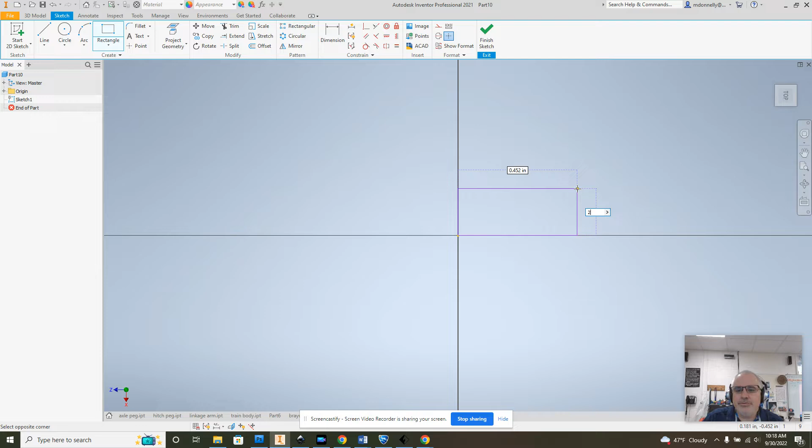Best to start on the XZ plane, that'll make it look right when you're done. I'm going to make a rectangle that is 2 by 5.5 inches long. So 2 inches, tab, 5.5, and finish sketch.

This shape we're going to extrude out 3 inches. Then we're going to grab the right plane right here, and we're going to do a new sketch on it.

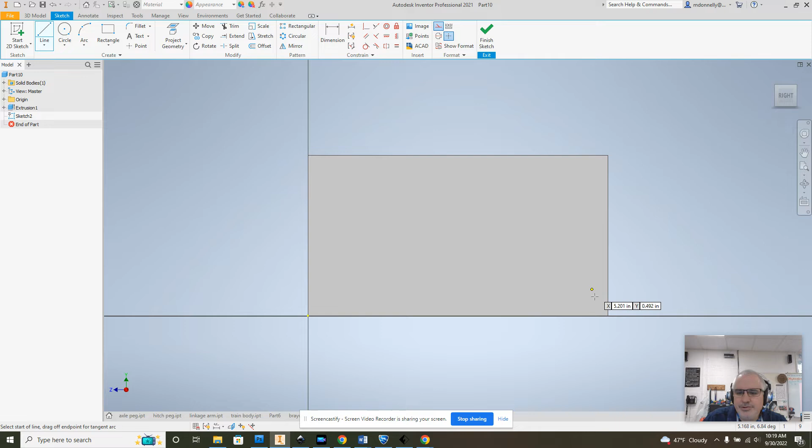We're going to use construction lines as I talked about in class on Friday. So we want to do construction lines starting here from bottom right. We're going to come over 1 inch, over toward the left 1 inch, up 1/2 inch, and then over 3.5 inches.

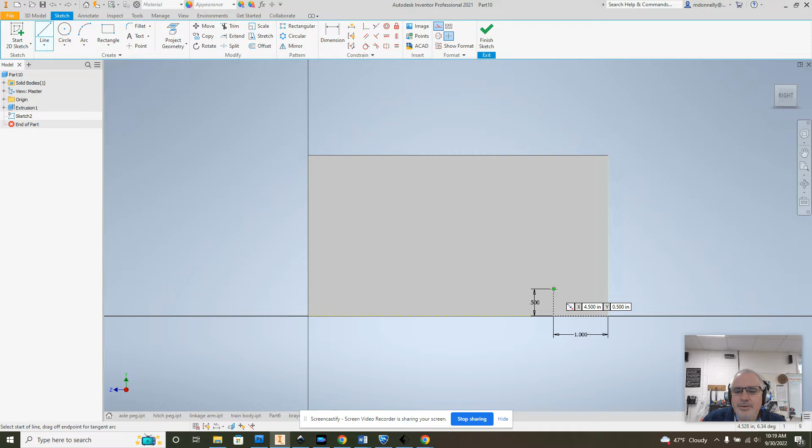Now that construction line, that can go away. Oh, that's not right, I got to fix that construction line. Somewhere right there. Over 1, up .5, and that way, 3.5. Okay, that's right. Turn off the construction line once you make those three lines.

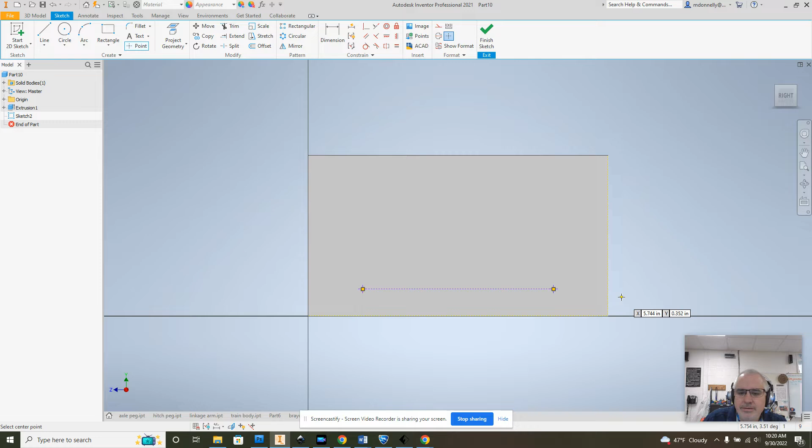These two really are useless at this point, we can just erase them. That construction line there, make sure construction line is turned off. We want to put a point at the end of each end of that line. Okay, and that sketch is finished.

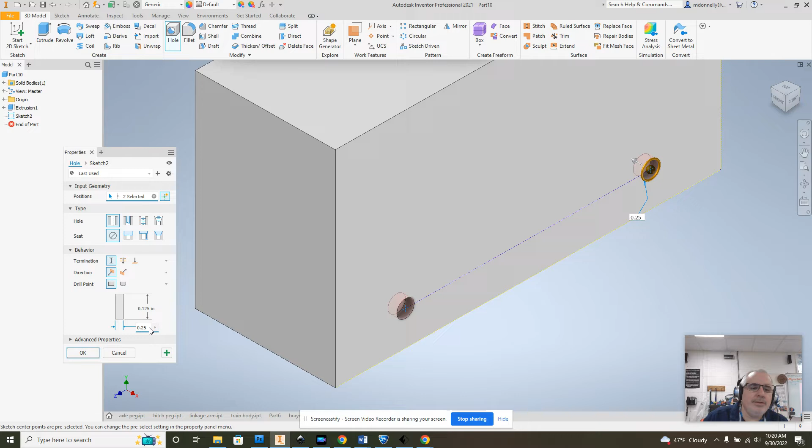Now we'll go to our hole tool. Thankfully, the hole finds exactly where we need to be by putting those points there. We're going to make a hole with a diameter of 0.25 inches. If you look at the plan, it calls for a 1/4 inch hole, through all. Okay, now we've got the holes in there.

We'll again go to the right side here, make a new sketch. Tap out because I need to work on this area here. We'll go ahead and start making the engine, the driver compartment, the engineer compartment right in front here. We'll again use construction lines to start this section.

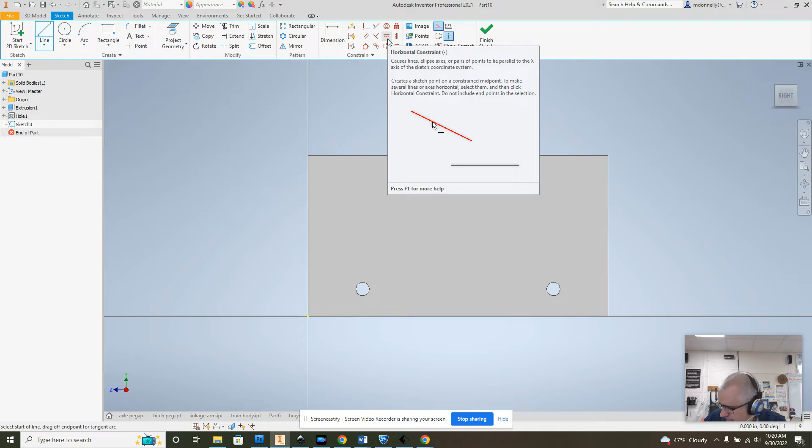We're going to go up 1/2 inch. That's where we're at, okay. Actually, we're going to go up 1.75 and to the left 1/4 inch. Up 1.75, to the left 0.25. Click OK.

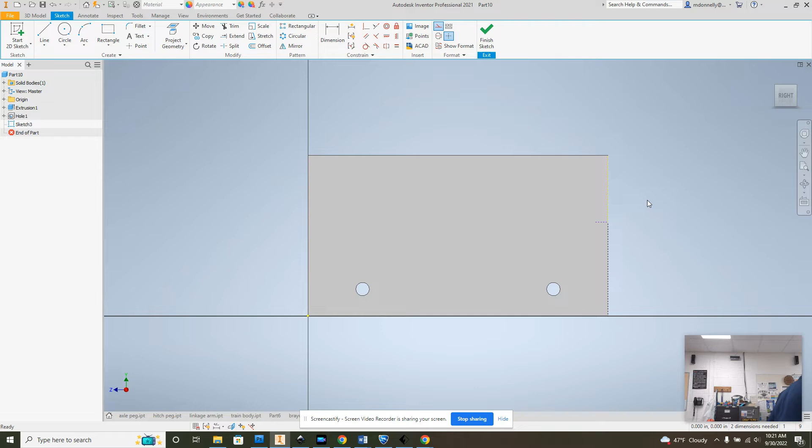Dimensions are getting in the way, make sure they're construction lines, I want to get those out of there. At the end of that construction line, hold on a moment. Sorry about that, this is kind of important. Left on the other table.

You'll see it calls for a radius of 0.5, so we're going to make a 1 inch circle at the end of that line there. And if you goof like I did and left the construction line, not a big deal. Click on the shape, turn off construction line, it's gone.

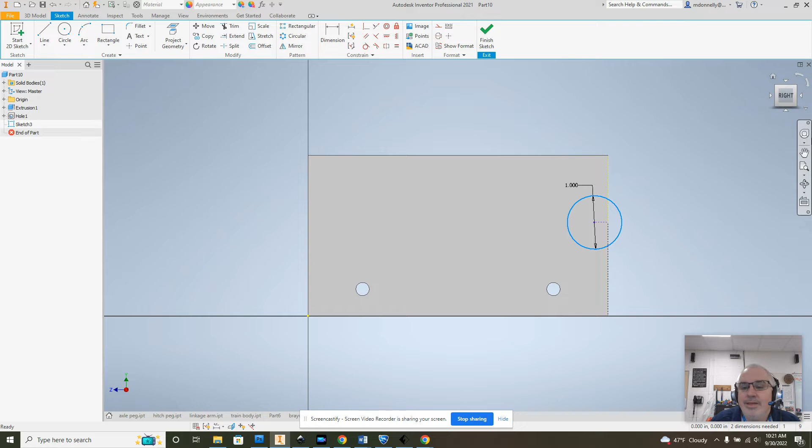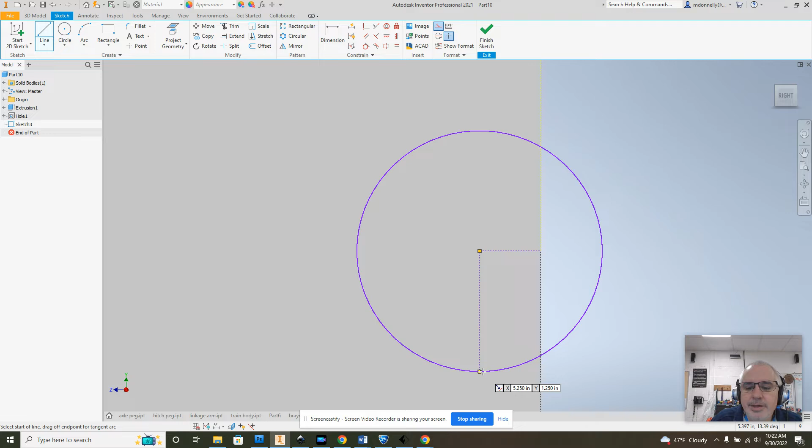Next, we want to zoom in a bit. I'm going to erase this line because I want to make another construction line to bisect it, because that'll make the next part a little easier. So we'll do a construction line, good. Straight to the bottom, 90 degrees, perfect. Straight up 90 degrees. Okay, turn off the construction line.

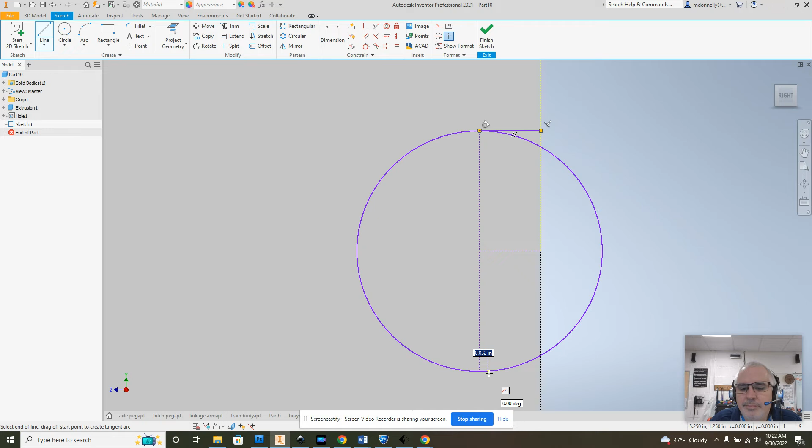We want to make lines that go from the center of the circle, as you see right there, over to the edge. Perfectly straight line like that, top and bottom. Next thing we got to do is project the geometry of the whole right side of the train.

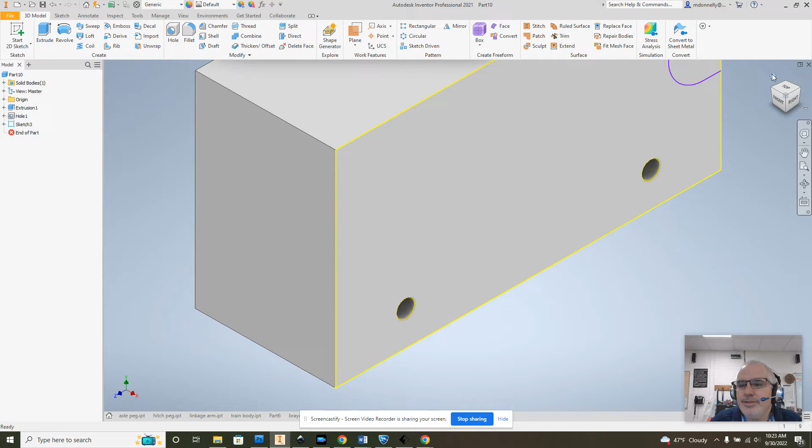Okay, now we can trim away what we don't need, namely these sections here and the construction lines, because they served their purpose. Finish sketch. And we'll go ahead and punch out that section right here, cut through all. Okay, there's that section done.

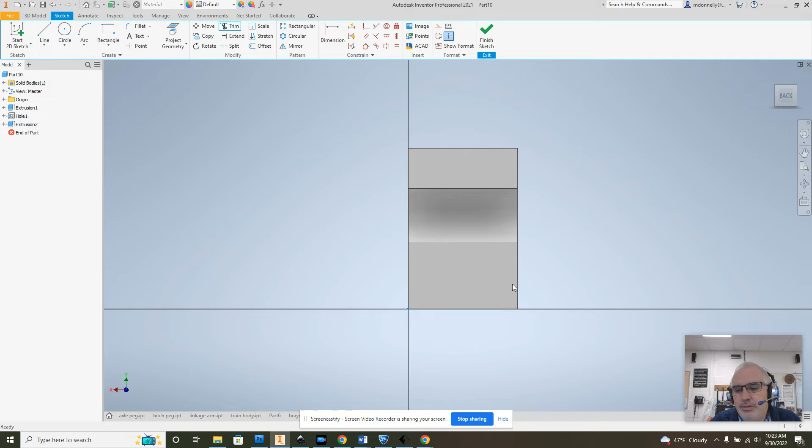Now we'll go around to the back of the train, and it's the back of the train itself as well. I'm going to go ahead and make a sketch down in this bottom section here first. The first thing we'll do, we again want construction lines. First one goes over 1 inch. Actually, don't need a construction line because it's halfway through.

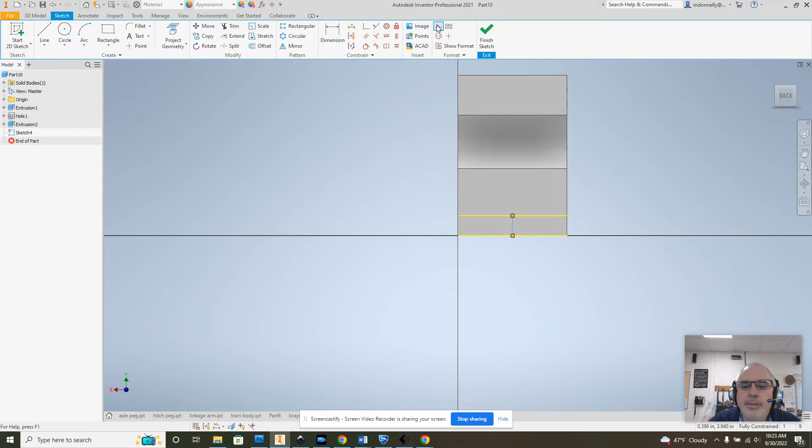At the halfway point at the bottom there, we got a little green dot that pops up, perfect. We want a construction line that goes up 0.375 inches, perfect. Where that construction line ends, we're going to put a circle with a 1/4 inch diameter. And we can go ahead and finish sketch.

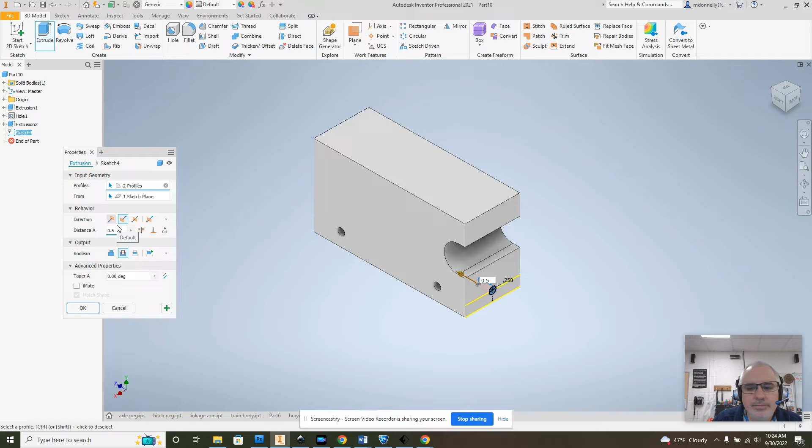That's all done. That circle we just made is going to get extruded inward, not 3 inches, but 0.5 inches. And that one's done. Now we'll make the top of the engineer compartment.

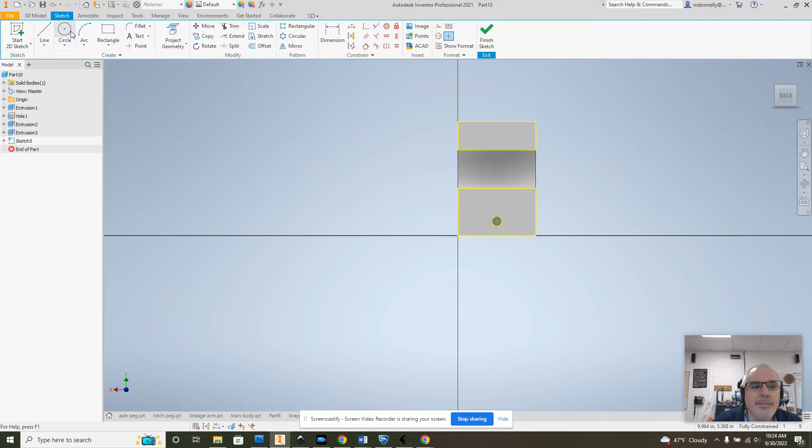We again are going to make a sketch on this plane. We want to project the geometry of both the top section here and the bottom section here, we're going to need that in a minute. Okay, we want to make a circle starting at the center of the circle of the hole we just made a moment ago. You mouse over it, it'll turn green, it'll tell you exactly where it is.

If you look on the plan, it's asking for a radius of 2.35, which for us means you can either make it do the math, 2.35 times 2, or just multiply it yourself, 4.7.

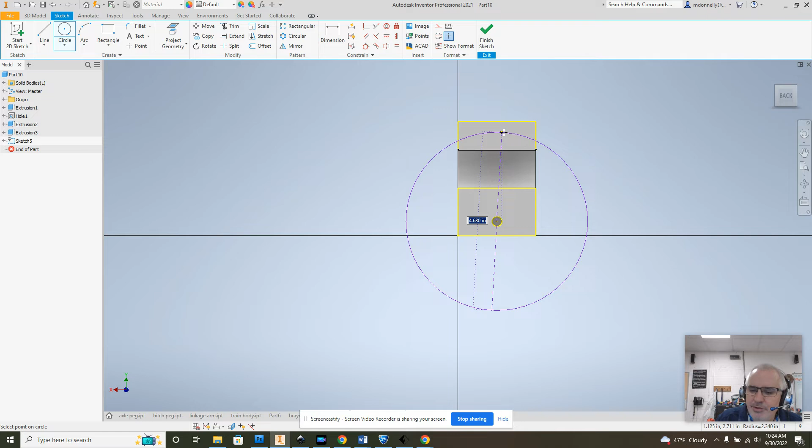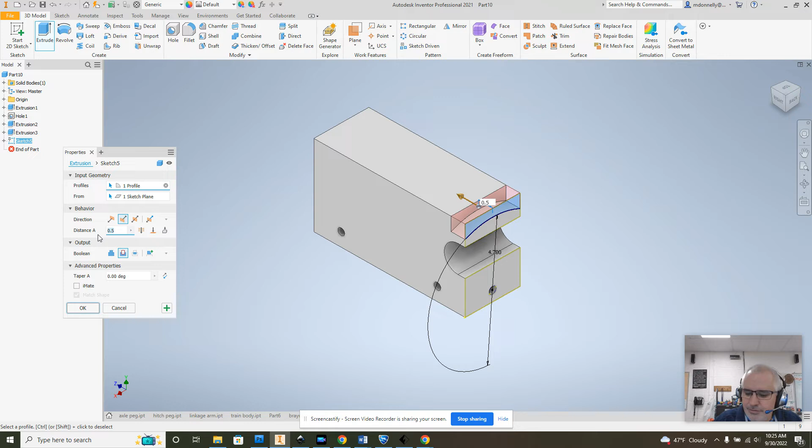Okay, with that done, we can now go ahead and trim away what we don't need, which is namely the whole outside of the circle. Finish sketch. Now we'll go ahead and extrude that top section right here. This again, we're going to cut in, and it's going to cut to a distance of 0.5 inches.

And back in the back of the train, the engineer's compartment, that's all done. Now we're going to go around to the front of the train compartment, also a front plane if you're modeling the same way I am. Right here, we're going to go ahead and make the front of the train.

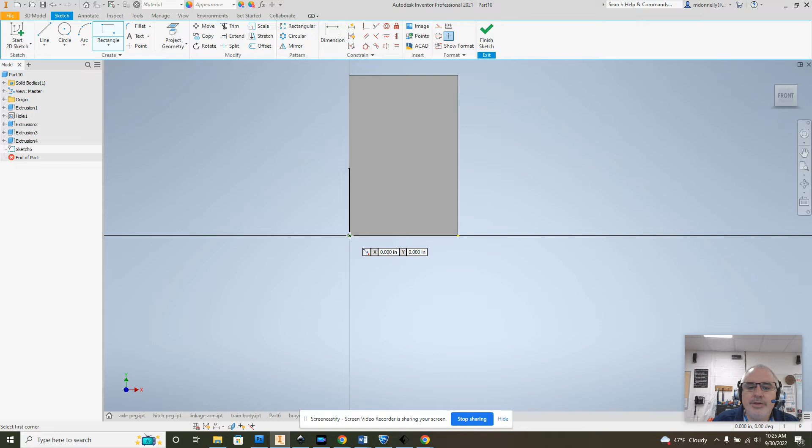So we'll go to New Sketch. First thing you want to do is put a rectangle along the bottom of this shape that is 2 by 0.88 inches. It's going to go all the way across 2 inches, with a height of 0.88.

Right click, okay. From the bottom, we're going to put in a construction line going up to the center that is 1.38 inches. I don't know why mine angled, but I got to redo it. Sorry that angled, easy fix. Straight up 1.38.

Right click, okay. We'll turn off construction line, and where that line ends, we'll make a circle with a radius of 0.75. All you gotta do is some quick math in your head, and you know that's a diameter of 1.5.

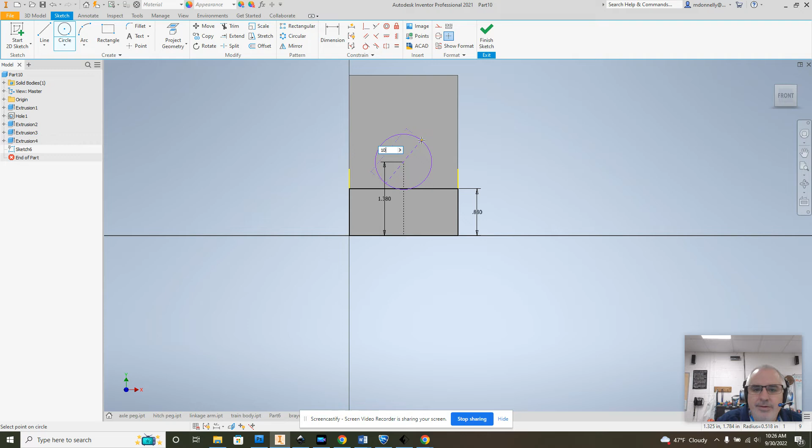Click okay. Now we can trim away what we don't need. Trim that, this, and this. Finish sketch.

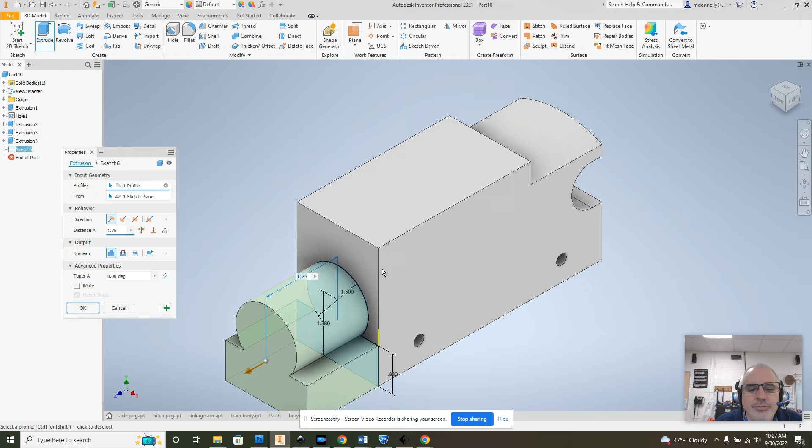We'll go ahead and choose extrude. We want to cancel, I'm not sure I projected that. If you forget to do something in the sketch, I think I didn't project the geometry here. All I can do is over on the navigator pane on the left-hand side, choose the item in question, the sketch, right-click, edit sketch, and project that geometry. Finish sketch. Now it's going to do what I want it to do because I want to choose that.

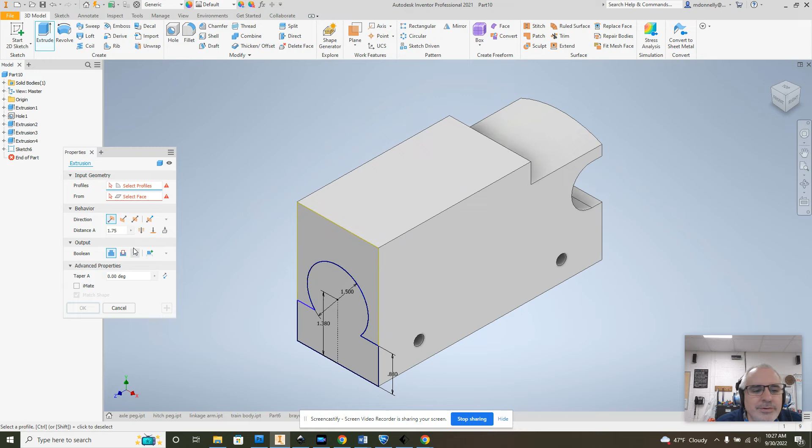We're going to cut. I'm not sure exactly how far this is, so I'm going to make it do the math of 5.5 minus 1.75, the length of the engineer compartment. Now it's starting to look like a train.

Next thing we'll do, we'll cut the holes here to mount the cowcatcher later. So we'll make a new sketch on that front plane, and again, we're going to make a bunch of construction lines.

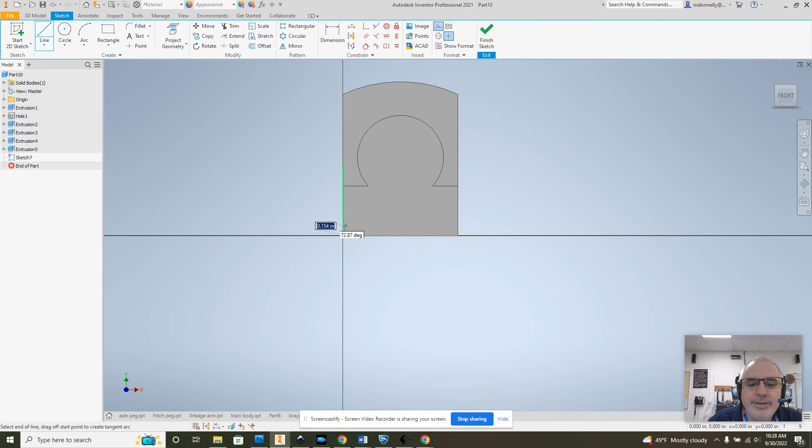We're going to make a line that goes up 1/16 of an inch, which is 0.0625. Escape, turn on construction line right here, up 0.0625. Okay, I got to modify this, I forgot a 0 in there. Actually, I got to erase it, it's goofed. Line, construction line, point 0.0625.

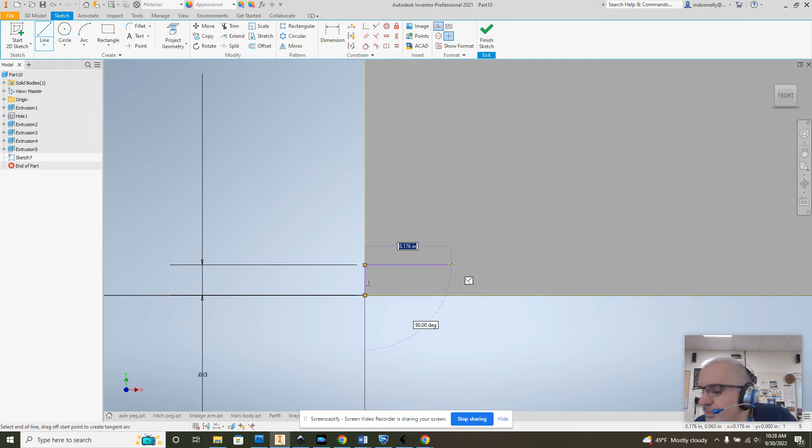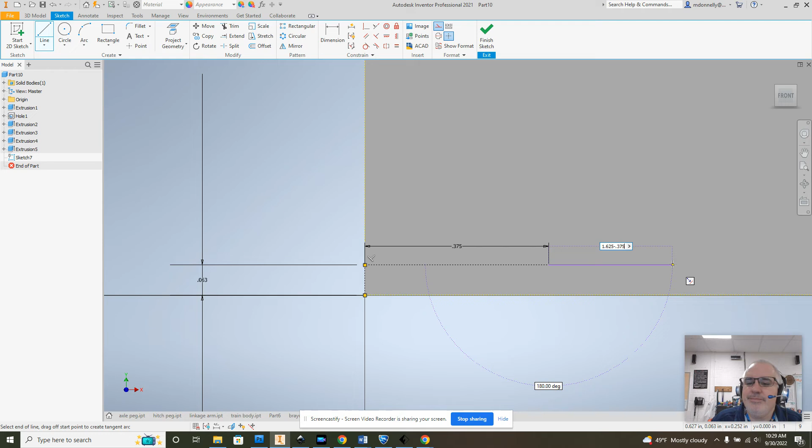We want to go over. What's that first measurement? That first measurement is going to be 0.375. And then we're going to make a second line going over. This one only gives you 2 lines, essentially both from this point here, to 0.375 and then 1.625. So here you can write 1.625 minus 0.375, and that'll give you the proper length. Okay.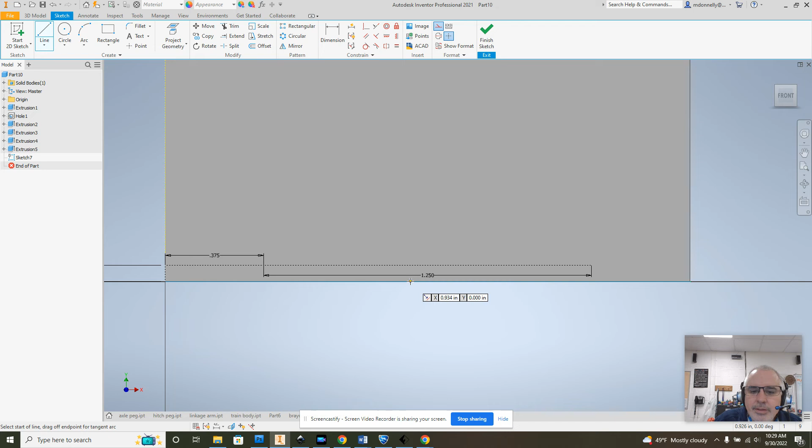One last line to make as we get this set up. We're going to make a line going up from the center that is 0.625, again a construction line. Let's find the center. Where's the center? There it is. Use the ability to find the center instead of trying to make guidelines every time, because if you don't have to, don't.

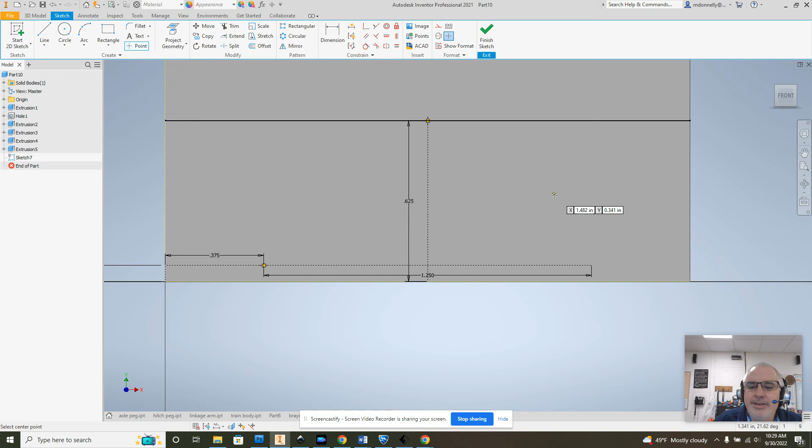Click OK, turn off construction lines. We are again going to use the point tool where all these lines end and add points in there. With those points made, we'll go ahead and finish sketch.

And then we're going to go back to our hole tool. We're going to make 3 small holes with a diameter of 1/8 of an inch, 0.125, and a depth of 0.125. Okay.

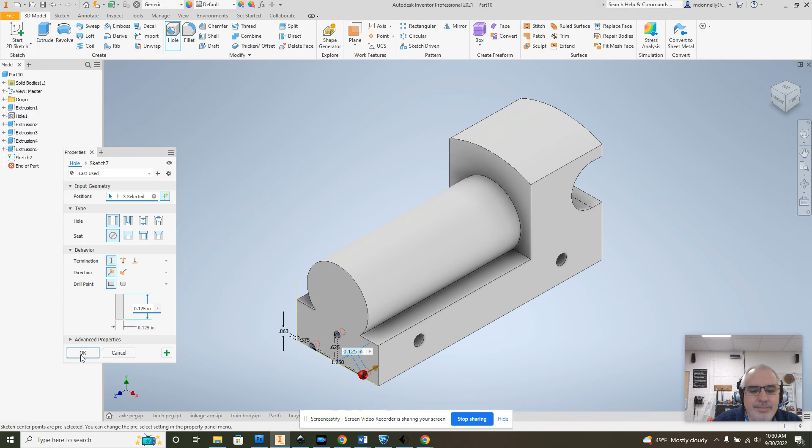Okay, last thing to do is we need to make a hole up here for the smokestack. To do that, we're going to need to make a whole new plane. So how do we do that? We'll select that surface, that curved surface right there.

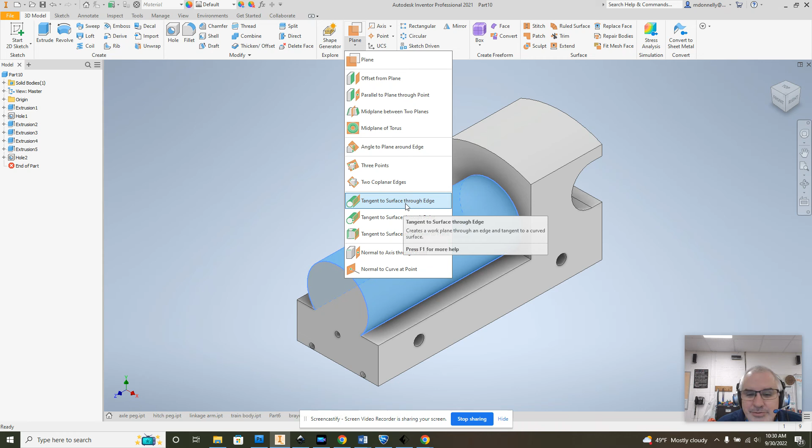If you click the drop down on the plane, you'll see a couple options: tangent to surface through edge, tangent to surface through point. Both of those are going to work. I'm going to choose tangent through edge. Actually, let me try tangent through point, that was more successful on my test run. That point right there at the top. Got it. Where'd that plane go?

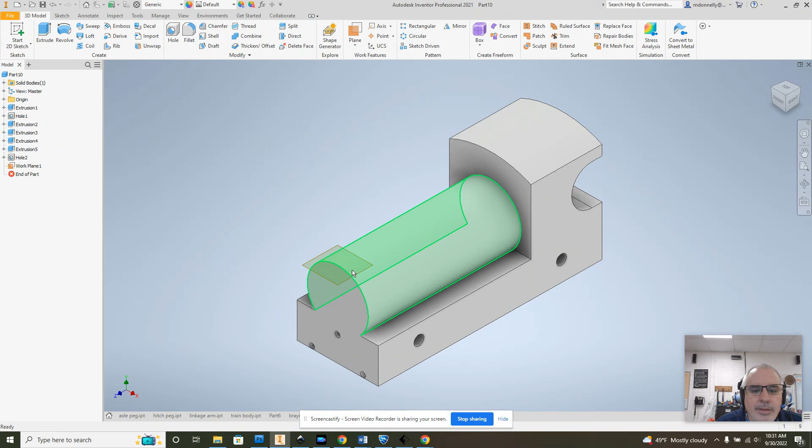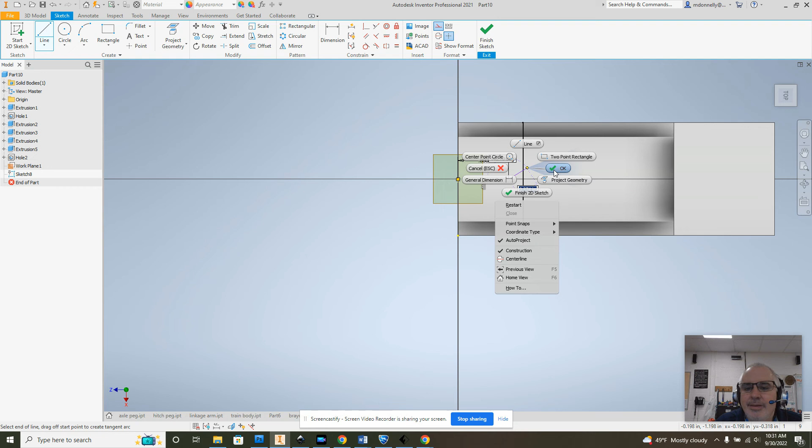We're going to do a circle, not a construction line circle, regular circle, 1/2 inch diameter. Finish sketch. Okay, that 1/2 inch diameter hole, we're going to go ahead and use it as a cut. It's going to be a depth of 0.25 inches, going down in there. Play with the settings to get it to do that. That's fine.

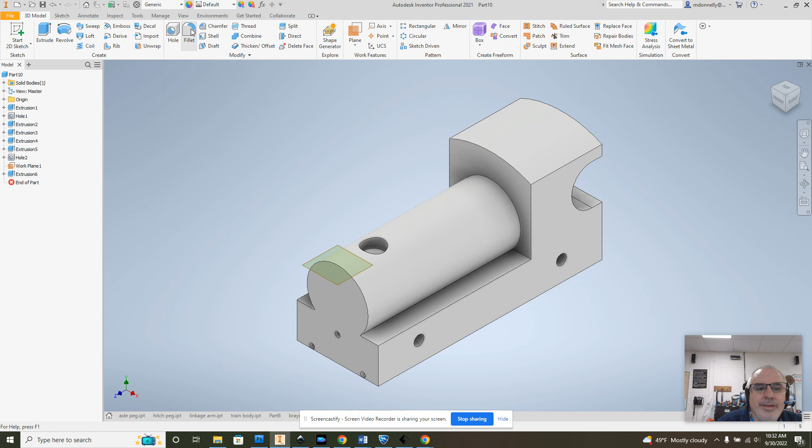Now, one of the things it calls for here, and I'm going to skip for one surface because it doesn't look like it's going to work, is to round every edge except the drilled holes. So the drilled holes are here, here, and here. How do you round it? You go with the fillet command. That's going to be 0.1, and you want to click pretty much on every edge you can. The only edge I'm not going to do is that bottom edge because I think it's not going to work.

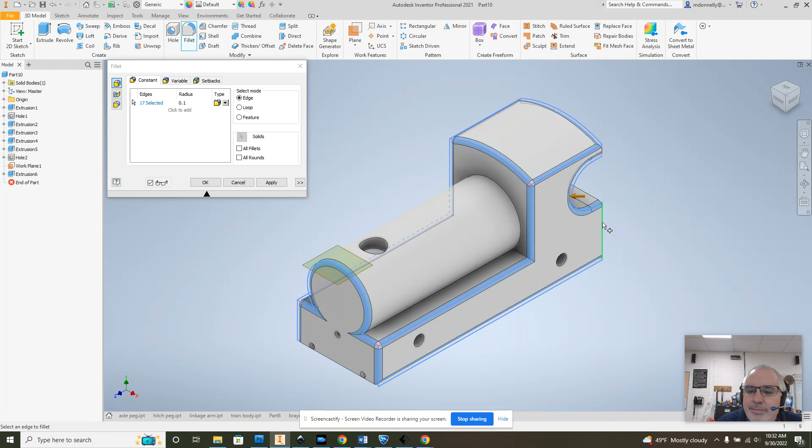As you see, you can do nearly every edge from this view right here. And we're done. Okay. And with that, the train body is done.